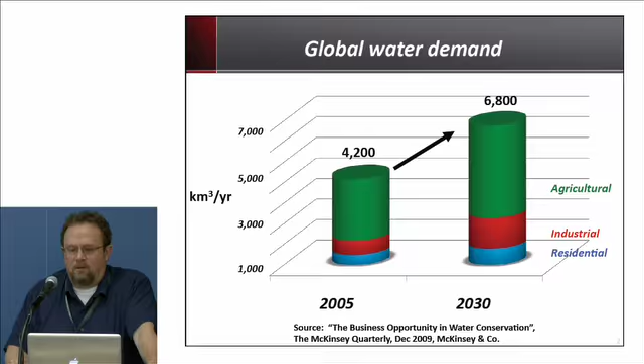6,800 cubic kilometers per year. That's a number to keep in mind now. So if we look at how much fresh water does nature produce, it produces, amazingly, through the sun, through the solar treatment system that we have, 107,000 cubic kilometers per year. We only need about 7,000 of those. So you could ask, what's the problem here, right? There's huge amounts of fresh water being created through the sun.

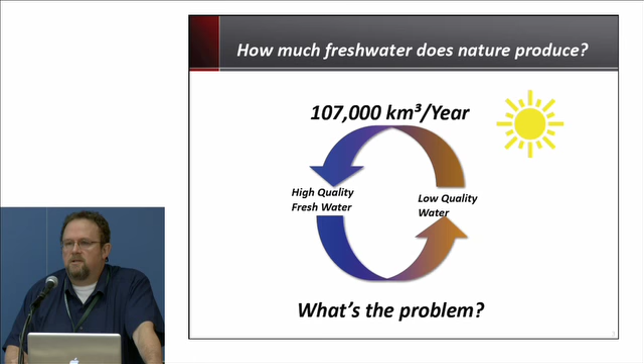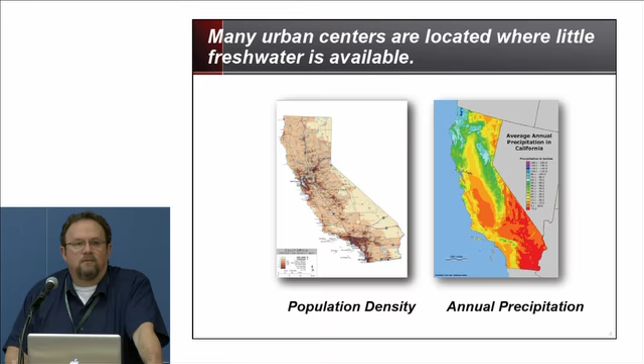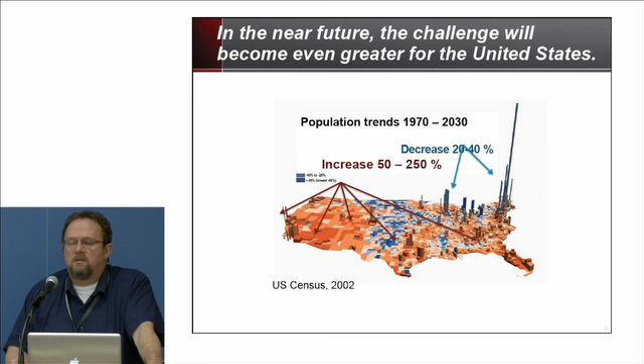So the problem is that many urban centers are located where there's little fresh water. It's a question of where the demand is, okay? So if you look at the population density here for the state of California, you can see it's dense in regions where there's almost no water, okay? And in the near future, this challenge is going to become even greater for the United States. So you're looking at projected trends in population and increases and decreases that will occur in different parts of the country. But in particular, in the water-scarce regions, populations are going to go up. That's the projection. So it becomes even a more serious issue, this question of water demand and how we'll satisfy this water demand.

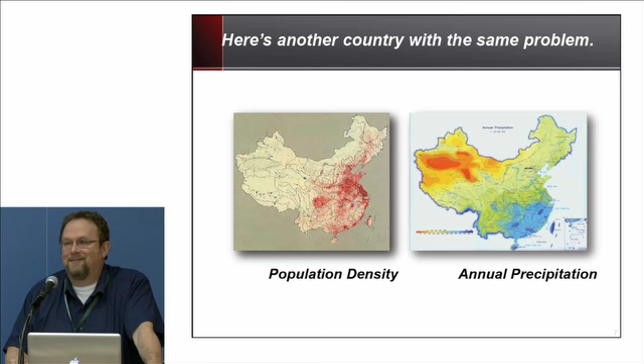But this isn't just a problem for the United States. Here's another country that has the same problem. Some of you are familiar with this country, right? A fair number, I'm guessing, okay? Look at the population density here, okay? What do we see? We see a lot of high density up in the north, and we have a lot of rain down in the south. So it's exactly the opposite of California, right? So in one case, we're going from north to south with our movement of water. That's how we've solved this problem, right?

We transport large amounts of water using large amounts of energy. And in California, from north to south, we're moving about 12 billion cubic meters per year. And in China, the plan is to move 45 billion cubic meters per year from south to north. So it's a huge transportation issue there, involving a lot of water and a lot of energy.

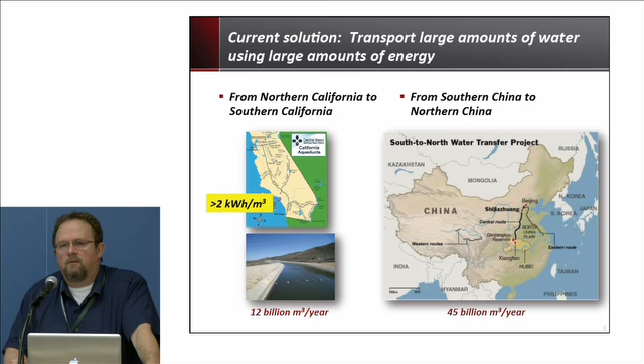So in terms of the energy demand, for us to do this in California, we need about 2 kilowatt hours or more, depending on where you're dropping the water off, 2 kilowatt hours per cubic meter of water moved from north to south. Some number bigger than that. Now keep that number in your head, 2, and then we're going to look at what are the other options that could compete with moving water over vast distances in space. So the question is, can we do better, right?

And so we want to think about, well, are there local water supplies that we could tap? And of course, one that people always bring up and comes to mind is seawater. We could get the water from a local supply, which would be along the coast. If you're located along the coast, you could use the seawater as a local source, remove the salt, and then you're in business, right? That would be one approach. Another is from wastewater. It turns out that wastewater, believe it or not, is where people are. It's local, right? It's always there. Okay, so we've got that as another option for a local source of water that could be tapped.

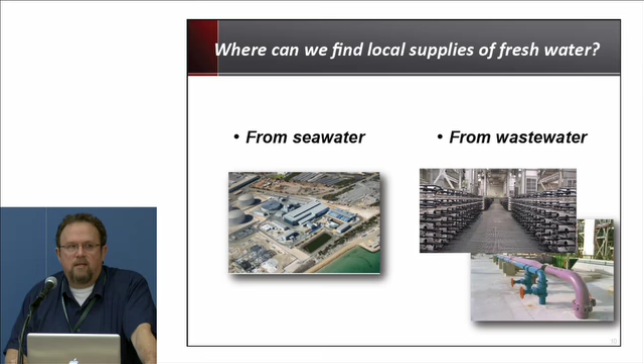So if we look at seawater and we compare it to wastewater, let's just do a side-by-side comparison in terms of what's in seawater and what's in wastewater. In both, we have salt, we have organic matter, and we have nutrients. If we look at the seawater, it has about 35,000 milligrams per liter, about 3.5% of salt.

3.5%. Domestic wastewater has about 500 milligrams per liter. A teeny fraction of seawater, right? In terms of the salt contamination, if we want to look at it that way. Wastewater, by contrast, has this organic carbon, which is both in a dissolved and a suspended form, about 50-50, a little close to that. And you can see the amount that's there.

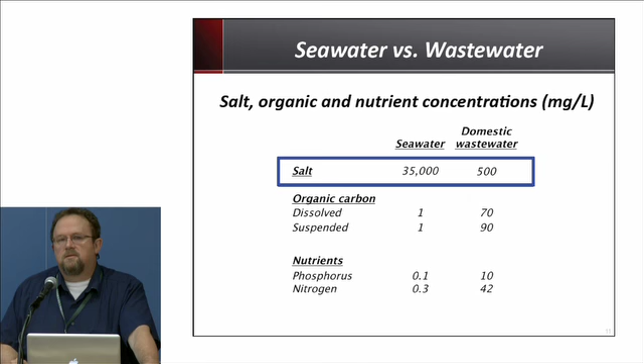And also there's nutrients in wastewater, which are lacking in seawater. Okay, so there's the big difference between these two. Lots of salt in seawater, comparatively low nutrients, and comparatively low in terms of organic carbon. So let's focus on the salt. And let's ask some questions about the salt. If we look at the energy for desalination, how much would it take to remove that salt from seawater?

Well, it turns out that if these are in kilowatt hours per cubic meter, the current value for removing salt from seawater using reverse osmosis technology is greater than 3 kilowatt hours per cubic meter. Now, what was the number I gave you for transporting water from Northern California to Southern California? So here we've got a process that is significantly more energy intensive than moving that water all the way from north to south. Okay? Now, on the other hand, if we want to remove the salt from treated wastewater, it's hardly anything by comparison, right?

It's less than 0.6. And I've also listed there thermodynamic limits. You can calculate, for the concentrations of salt that are in seawater and in treated wastewater, how low it could go in theory. And you can see for seawater, we're never going to do better than 0.8. It's just a limit, a thermodynamic limit. We can't beat that. On the other hand, with treated wastewater, you could go down to 0.03. So we see a huge energy advantage when we're talking about purification of treated wastewater and removal of salt compared to seawater. Huge advantage.

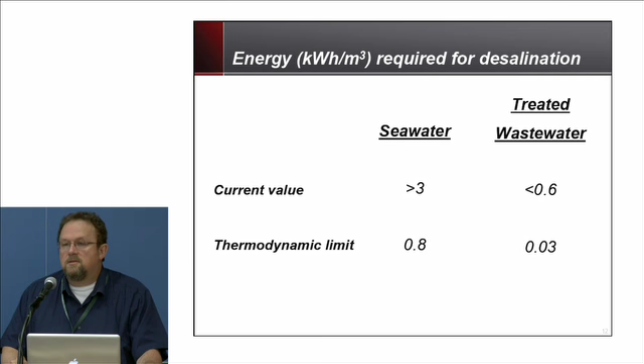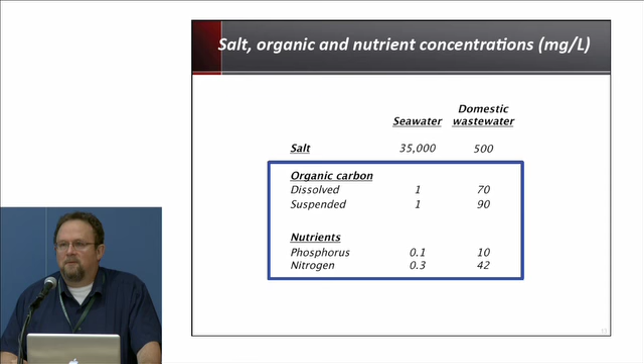So now let's focus a little bit more on the other two parts in this comparison, the organic matter and the organic carbon and the nutrients. And you notice in this case, we'd say, oh, advantage seawater, right? But is it really? It turns out wastewater treatment requires about 3% of the electric load of developed countries. And conventional wastewater treatment requires about 0.6 kilowatt hours per cubic meter. That's used to get rid of the organic matter and the nitrogen that's in the wastewater. That's essentially what it does.

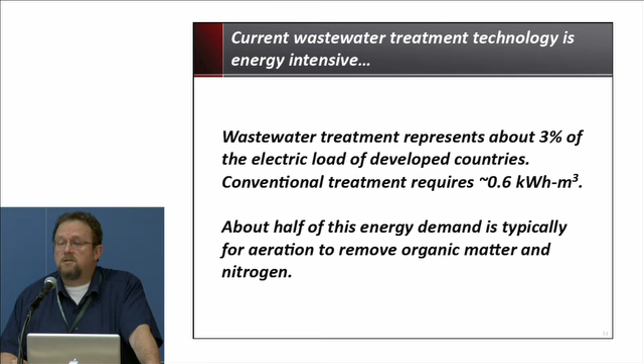So typically about half of that energy requirement, about 0.3 kilowatt hours per cubic meter, is needed just to supply air to the microorganisms that are used to degrade the organic matter and remove the nitrogen. It's just oxygen. So here's a treatment plant close to us at Palo Alto that we've worked with for many years now to understand energy use. They did this audit, and we've worked with them understanding the audit. And you can see here the kilowatt hours per cubic meter for each of the different units as you move through a wastewater treatment train, where components of the wastewater are removed.

And what you notice at Palo Alto treatment plant, they do aerobic treatment, and there's no anaerobic treatment for production of methane. Aerobic treatment to remove the organic matter that's present. They also remove the nitrogen that's present as ammonia by burning it essentially to nitrate. And the last thing is they have this incinerator that they use to get rid of the solids, and it's extremely energy intensive. They have to import energy for this. And so altogether, they end up using 0.9 kilowatt hours per cubic meter.

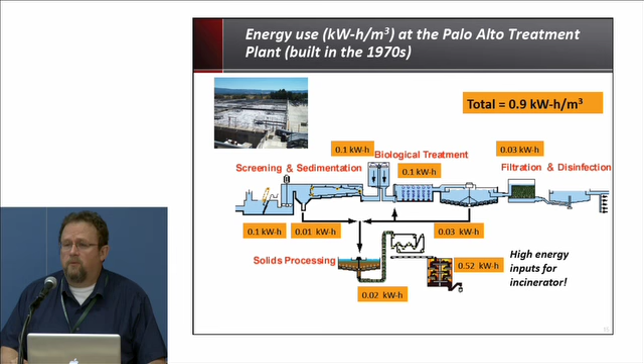That's Palo Alto. It was built in the 70s, and most of the wastewater treatment plants in the Bay Area and in the United States were built about that time. They've all basically reached their design life. So a typical plant, as I said before, uses 0.6 kilowatt hours per cubic meter. The reason this plant is high is because of the incinerator. Otherwise, it would be below average.

So rather than taking these organics and essentially burning them through providing lots of air or incinerating them, what other thing could we do? If we look at the chemical energy embodied in this wastewater organic matter, what we see is that if we were to take the organic matter out of the wastewater and burn it, it could generate, in theory, 1.7 kilowatt hours per cubic meter.

Rather than being a net energy sink, it could be producing energy. And the same with the nitrogen, the reduced forms of nitrogen. Rather than requiring energy, they could be used to produce energy, and we'll show you how here in a little bit with research we're doing.

So it turns out, remember that number, 2 kilowatt hours per cubic meter to move the wastewater or the water from north to south. That's about how much energy there is in chemical energy embodied in wastewater that could be harvested. So it turns out wastewater has 3 to 4 times more energy than is needed to treat it. 3 to 4 times. So you can easily envision energy neutral wastewater treatment.

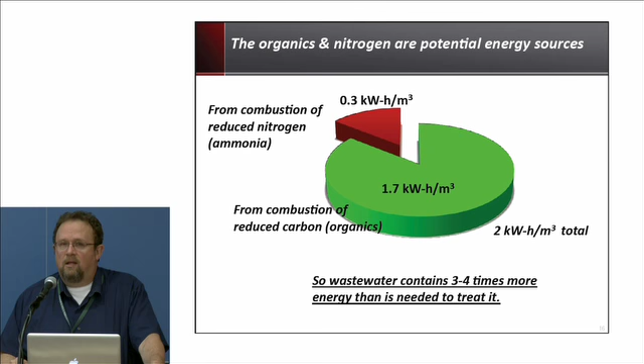So conventional treatment with anaerobic digestion of solids is accomplished this way. You essentially have wastewater coming in. Remember, I told you that some of the organic matter is dissolved and some of it is present in a suspended form that can be settled out. So that suspended matter is typically moved to an anaerobic digester like I'm showing here. And you can see that you can produce energy from that.

Now, this would be a conventional process used, for example, today at the city of San Jose or Sunnyvale or East Bay MUD. There's many places around the bay that do this. But the other part, the dissolved organics, are typically treated aerobically. Microbial communities that self-assemble are used to burn, essentially, these organics, and the biosolids produced are transferred to the digester to produce some energy. A lot of energy, though, is required for this aeration step.

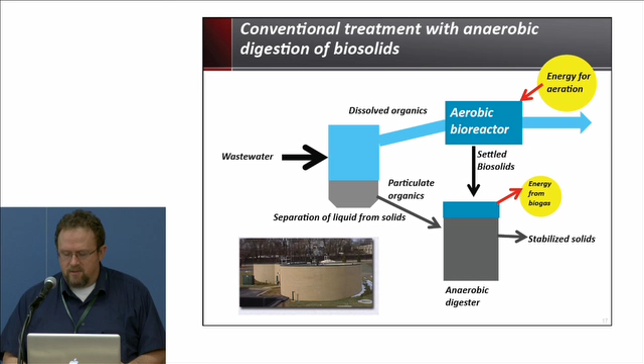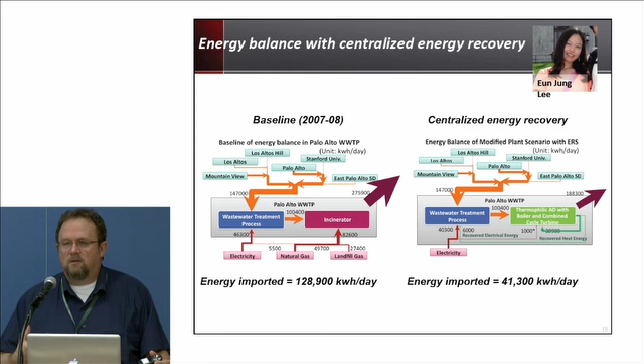If they were just to implement a conventional anaerobic digestion process with the organic matter, like I just showed you, they could decrease significantly from 129,000 kilowatt hours per day imported down to 41,000 kilowatt hours per day. And this is work that's being done by a grad student working with me, Eun Jung Lee. And this is sort of a systems level approach that we're trying to take to that problem.

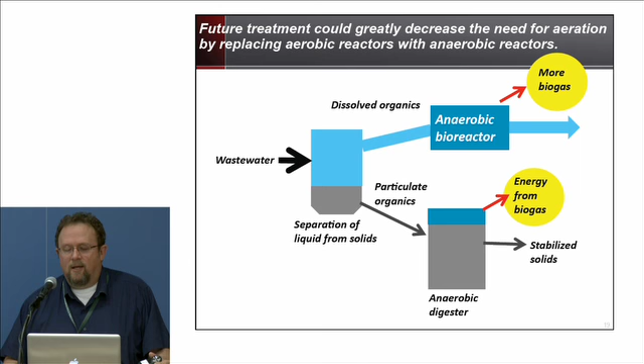So it turns out that the other part of the organic matter that we're not yet recovering methane from could be used to recover methane. So the dissolved organics stream, we could put it in an anaerobic reactor and produce more biogas. And there's other technologies out there that could also generate energy, and we're working on some. But here's one example of a promising process.

Professor McCarty, who's an emeritus professor at Stanford and also working at Inha University in Korea, they developed a process where you can take this dissolved fraction and put it through a unit that looks like this. I hope you see that. Yep. And then it goes to membrane filtration. They purge it with air. And essentially this gives, it turns out, very efficient treatment of the dissolved organic fraction.

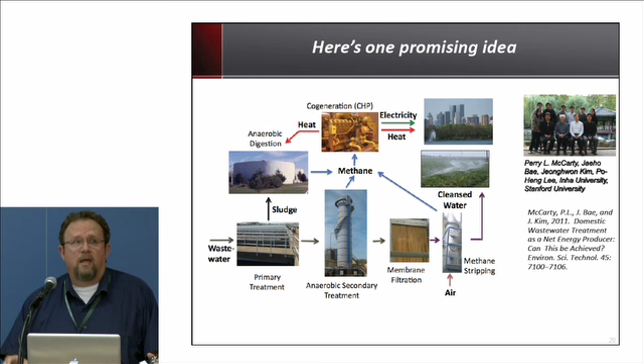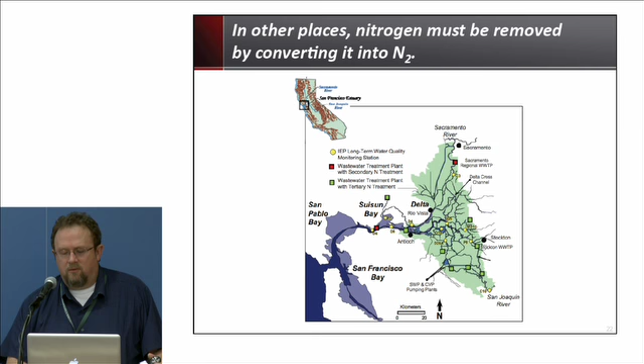So if we look at conventional nitrogen removal, and here's a little bit of chemistry, we start with a mole of ammonia, and you can add up the oxygen and the electrons that are used to get it to nitrogen gas and remove the nitrogen from the water so that it's not fertilizing the Bay Area, for example. And it turns out that removal of a mole of nitrogen requires about 2 moles of oxygen and 9 moles of electrons and generates biosolids that store about 4 moles of electrons.

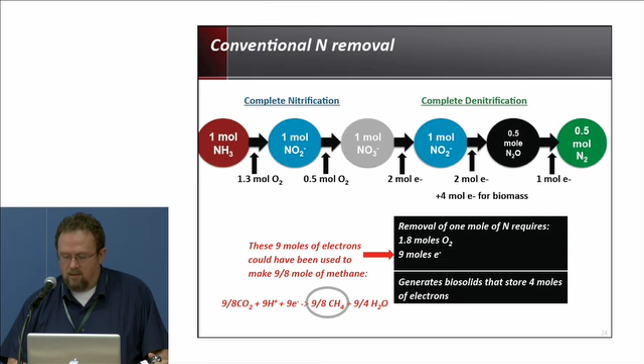It turns out that these 9 moles of electrons could have been used to make a little more than a mole of methane. So we're losing the opportunity to generate energy when we do this conventional process. Now, a new process we're looking at takes advantage of the fact that this process goes through nitrous oxide. And we say, well, what if we just stop this process right at nitrous oxide? So it turns out nitrous oxide is like methane. It's both a potent greenhouse gas and it can be used as a fuel.

And I learned this from Yaniv Scherson, who showed up at my door one day. He's working with Brian Cantwell in aeronautics and astronautics. They're using nitrous oxide as a fuel. They can run these little cool looking devices, as you see here, little engines essentially.

And so the idea that we're taking now and working on is we take ammonia to nitrite, convert it to nitrous oxide, and then we decompose that, and that can be decomposed as shown here. And this is done in race cars, as you may know. And if there's time in the question and answer, I'll show you something on that.

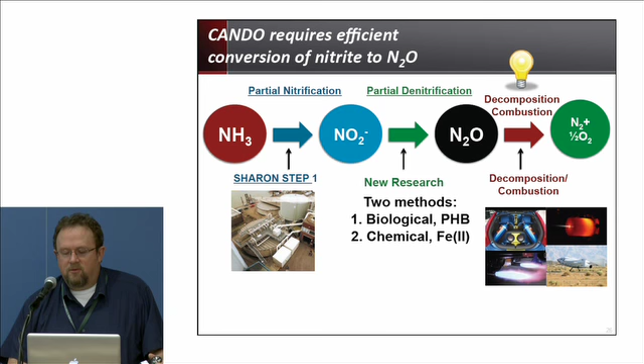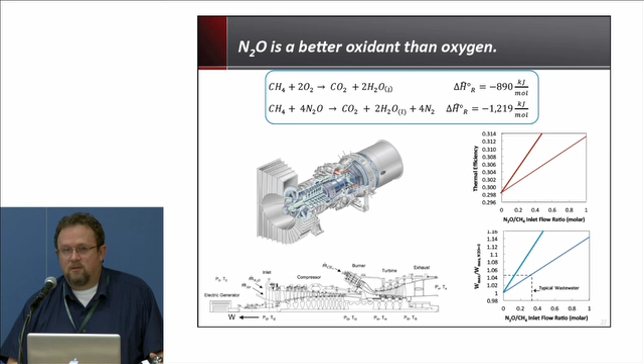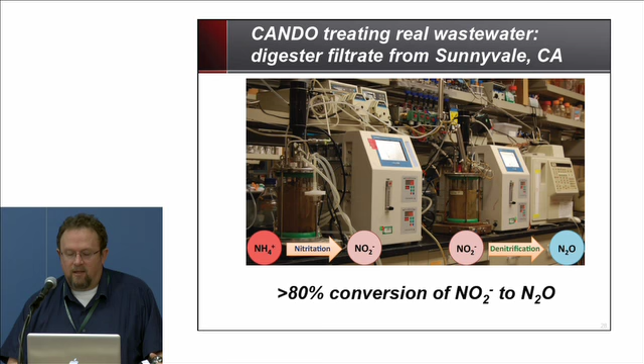And then two methods: biological PHB is a method we use to convert nitrite to nitrous oxide, or a chemical process. And it turns out, if you do this, then nitrous oxide is a better oxidant than oxygen, so we get more energy from these engines. And that's the big advantage here. It gives an energy boost. So we're treating real wastewater right now from anaerobic digesters from Sunnyvale, California. We've also been doing East Bay MUD more recently and getting high efficiency of conversion of nitrite to nitrous oxide.

So the summary is that if we look at this process, you can do the stoichiometry here, and if we remove 1 mole of nitrogen, we need 1.3 moles of oxygen, 4 moles of electrons. So we have significantly reduced the oxygen requirement. We've decreased the amount of biosolids produced, and we've increased the amount of methane, or methane equivalents, that can be produced. So this isn't yet scaled up. We're working with groups around the Bay Area to do that. It uses a rapid process. We could maybe get phosphorus removal as well with this process, and we think it will be flexible for retrofits of the existing systems.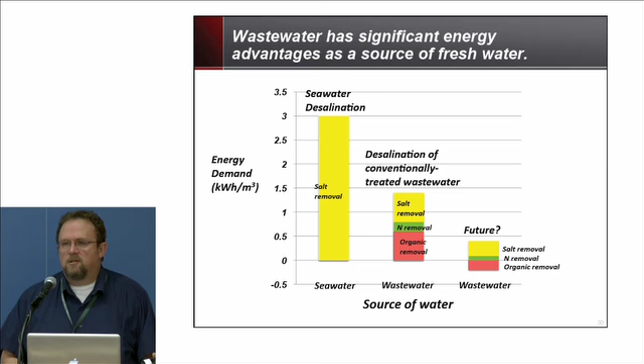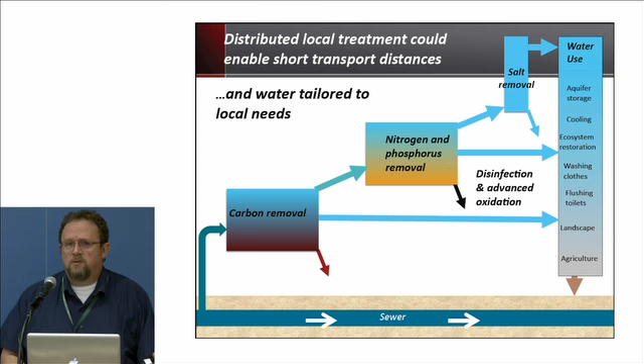So distributed treatment is another thing that we were interested in. This is where you take the sewage out of a sewer, remove the carbon, disinfect it, and then use it for local uses. Another option is to remove even more contaminants like the nitrogen and phosphorus, and then it can be used for higher level things. And if you remove the salt, you can get very high level uses. And as I showed before, we can estimate now what we could be in terms of energy with doing all of those 3 steps and tailoring the water for different applications locally.

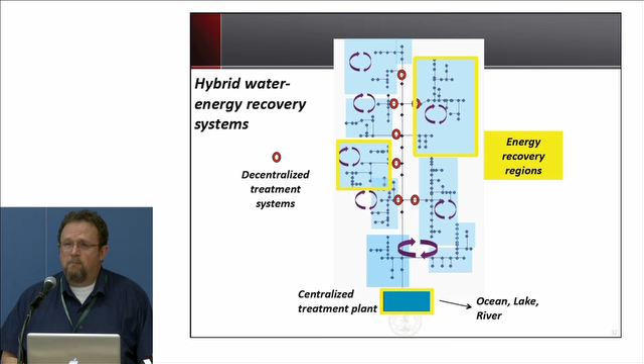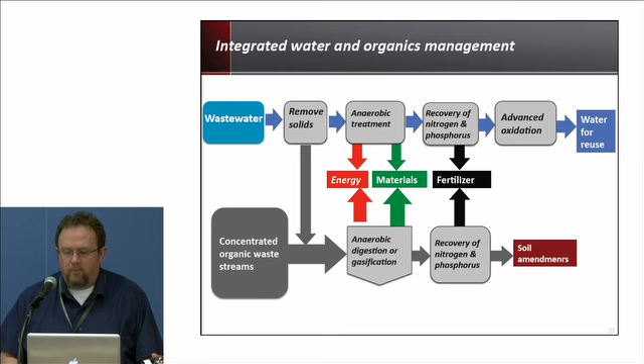So you can imagine hybrid water energy systems where water is recovered in different local places and reused locally through local treatment systems, like that. And we might even have some places where it makes sense to recover energy as well from these organics. And in the future, what I expect is that we'll have more and more integrated water and organics management. So here's wastewater going through its treatment process to get clean water. From that, we get the solids out, and you could have organic waste that is collected in another way that is combined with these organics here, and we digest them, recover nitrogen and phosphorus, and we create a whole variety of products. So wastewater treatment plants become resource recovery centers.

And this is just showing a place I was at just 2 weeks ago, Sejong, South Korea. It's a city in the center of South Korea they're building.

And I just want to show you that here is a place where they're doing integrated organics waste management. So biosolids are being produced from the wastewater and digested here. But they also take food waste and plastic, and they separate them through this interesting vacuum collection system. You put this stuff in what looks like a mailbox here, and it just sucks it. And then it separates the plastic from the food. And the food is digested in these digesters, and the plastic is converted into pellets that they incinerate.

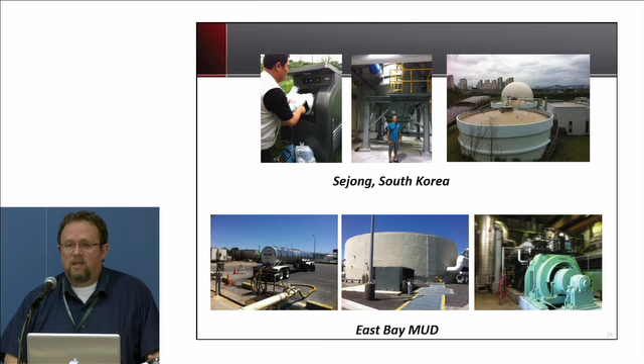And then here's, this is East Bay MUD here. And this is, I think, the first wastewater treatment plant in the United States that's energy positive, producing energy from biosolids. And they've done it by bringing in organics from all around the community from different sources, food waste, fats, oils, and grease, and so on. And they're digesting them in their digesters and producing more energy now than they bring in. So it's a net energy exporter.

And so that's the end of my presentation. I do want to advertise a couple of classes that I teach. 177, Aquatic Chemistry and Biology. If you have that class, you can take the subsequent class, Environmental Biotechnology, which has to do with these kinds of use of microorganisms to recover clean water, clean energy, and also valuable materials. Thanks.